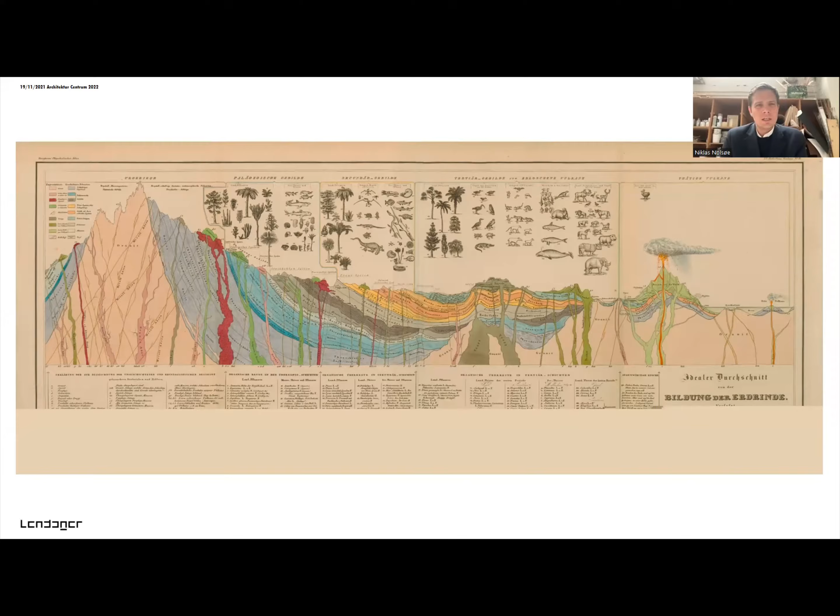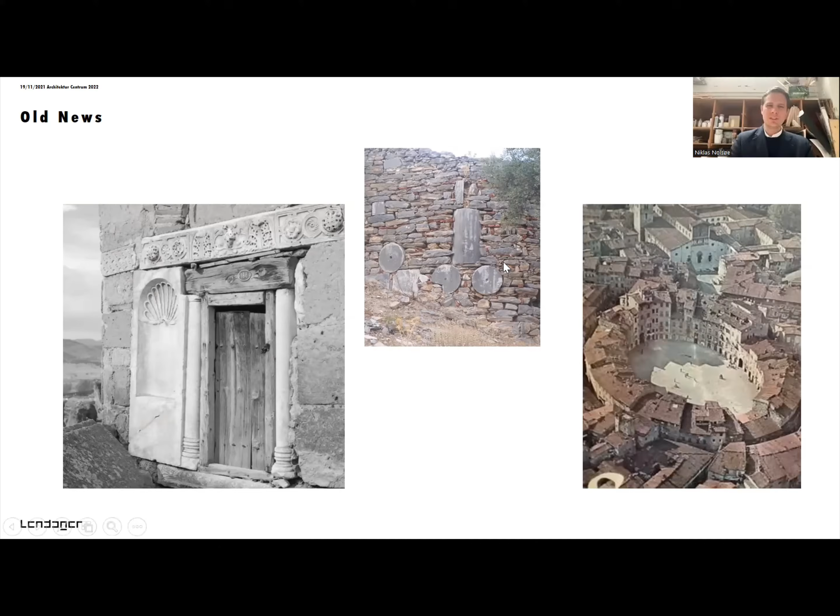This is a huge part of our methodology. Also, the way we look at things is that we're not trying to invent new things. We're rather trying to reconnect with our own past and understand that being more sustainable, being more holistic is something that we've always been, but we changed a lot in the last 70 years.

So our change-making as an architectural company - I have 3 examples, and then I have some knowledge that I'd like to share also. One of our projects is the Upcycle Studios. It was finished in 2018, so all the project development was between 2015 and 2018.

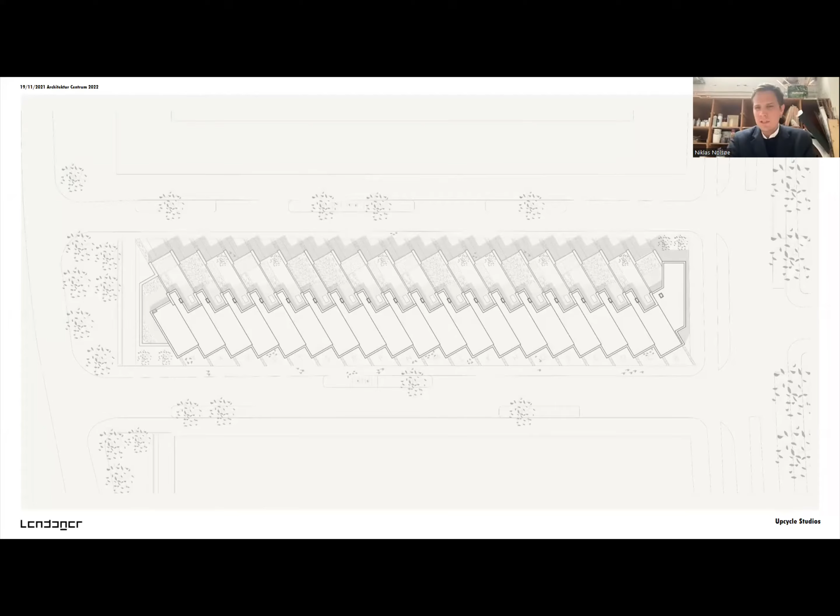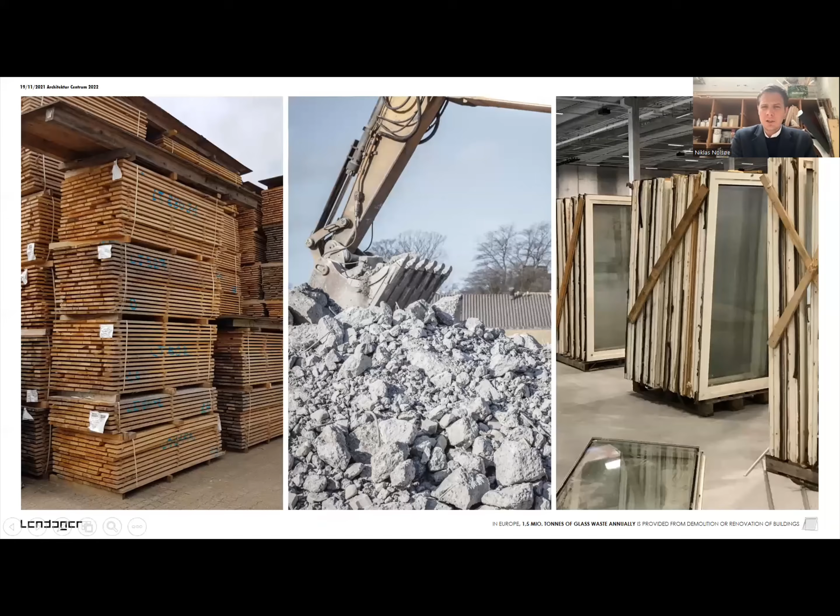It's a pretty standard row house typology where we try to mix in a new way of living, where there's both the option to have an office and to have homes. This big space you see out here is the commercial area that's connected to a big commercial building on the other side. Then the rest of these floors are the homes for the people living there. It's a huge project of interest for people living there, and the waiting list is so long that we're lucky if we get to see one of them without anybody living there.

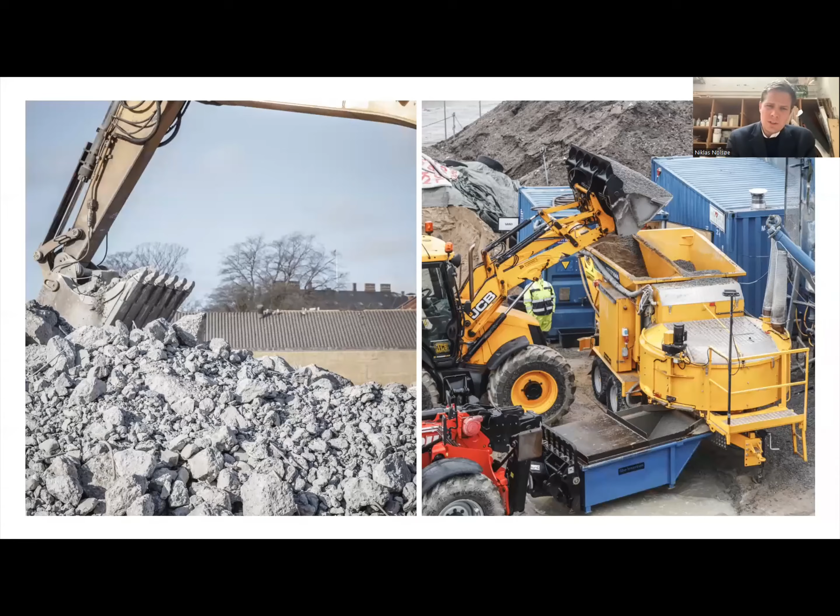But the project is what I call naked architecture, and it consists of 3 primary resources: wood, concrete, and windows. And in all of these, we try to solve an issue. So first of them is that concrete plays a huge part of our carbonization globally - cement alone is more than 6% of global CO2 emissions. And we are building more and more structures in concrete every single year. So we try to fix this by looking at how we can actually work with concrete and then use it again.

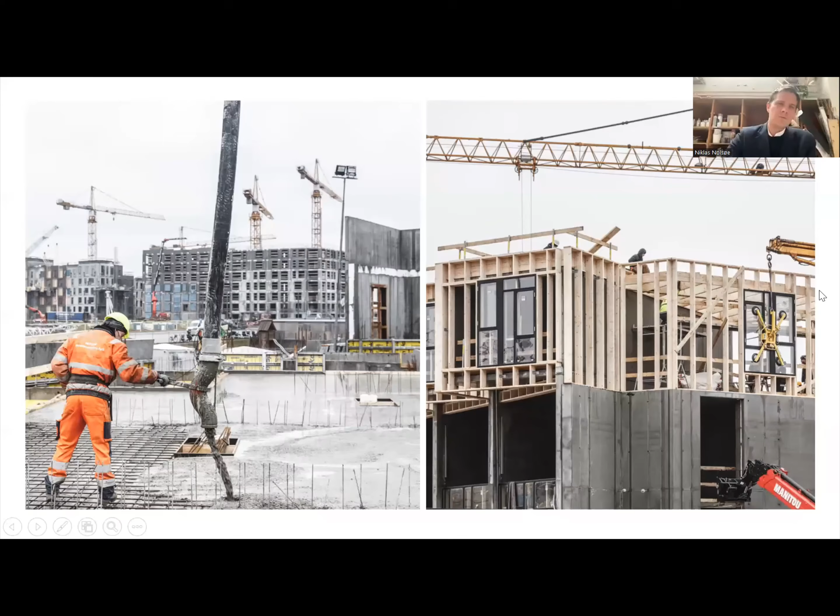So in Copenhagen, they were building a metro project, and we got all the scrap casting from that - miscasting, broken casting - and crushed it and put it into this new concrete. So 45% of the concrete is old concrete from a metro project in Copenhagen. And we built our own factory on site in order to do it, because the industry was not at that time, and is still not always, working with us.

The other part is the windows, where we gathered 20-year-old windows, 2-layer thermal glass that's been taken out, and then it's been changed out for new 3-layer windows, because we have this thing called an energy renovation. I would ask the question if 20-year-old windows are the ones to take out, but that's how it is, and that's how it's been done. So we look at the resource we get - that's a well-functioning 20-year-old 2-layer glass.

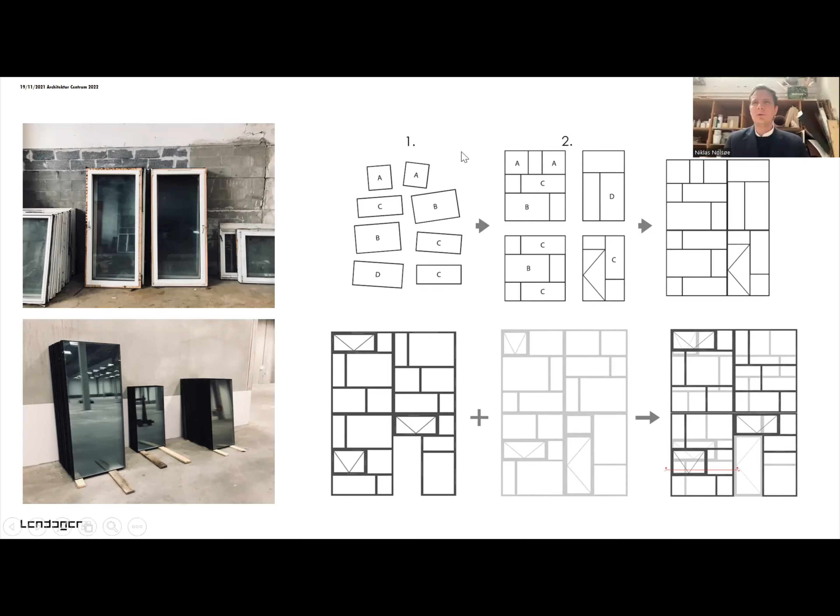As you can see here, the first photo is how they look when you take them out. And the second one is when we take them out of the frame, clean them, and go through a very thorough checking list. We did something called a body age test on the windows, where we test how long a life they had been living at the time we were getting to them.

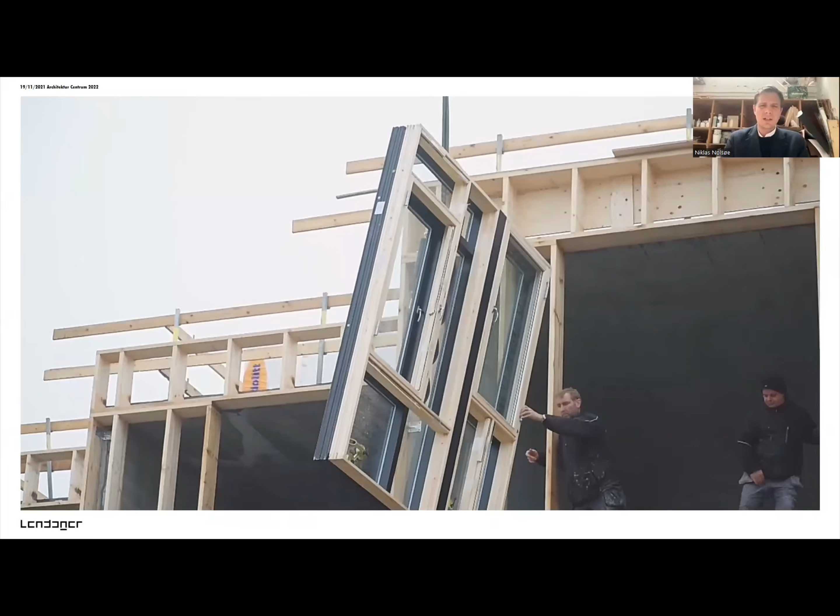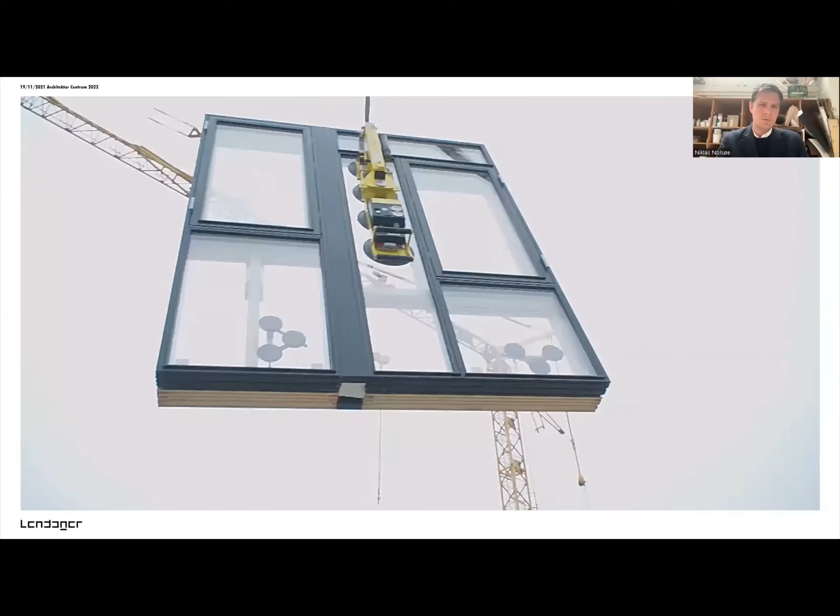You could also see in the previous slide that there were some design struggles. In order to reach this 2020 regulated energy house, we actually built a double frame where we put on 2 layers of 2-layer glass, old glass, both of them. As you can see here, in everything we do, we try to fix the problem within a known parameter.

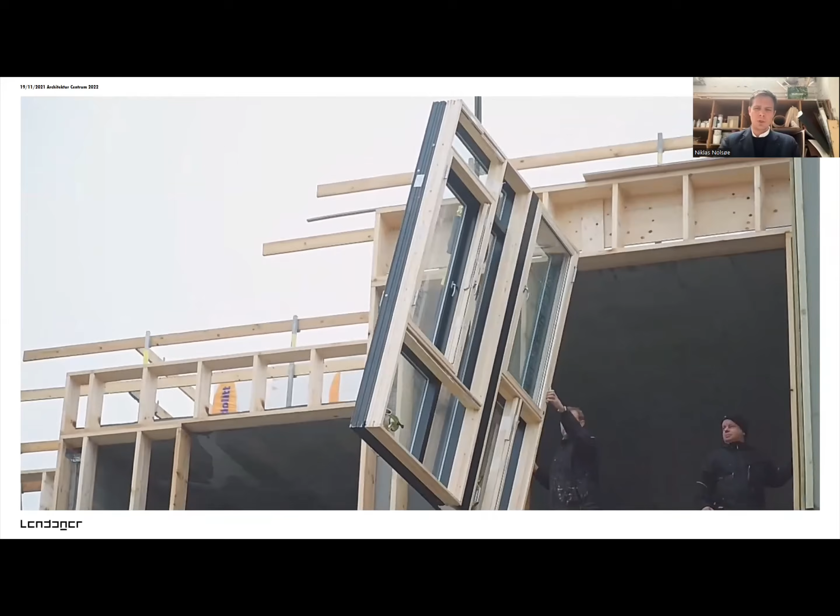So the window works just as a normal window. We don't change how the window works. We only change the prerequisites, which is the reuse and the using of the fine existing resource.

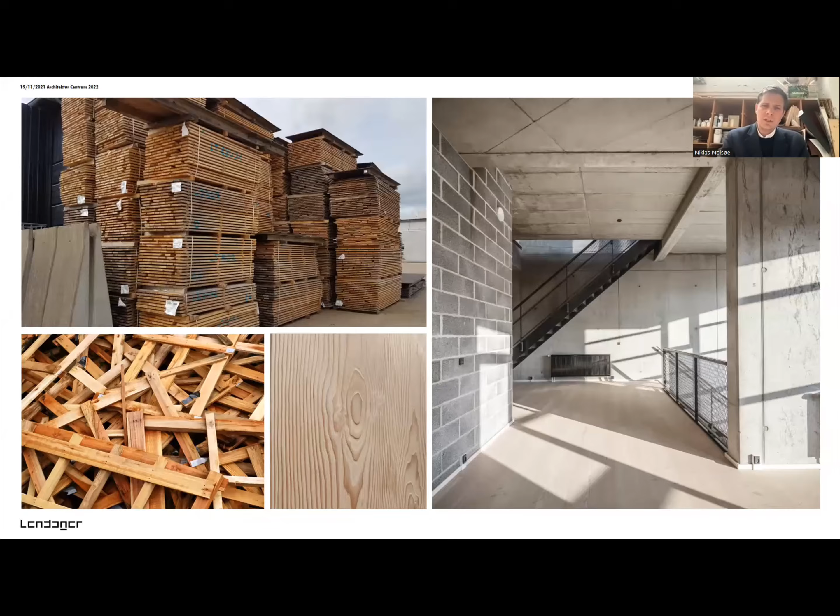Here we have the wood. All the wood in this project is cutoff or simply discarded wood from a floor maker in Denmark. The cutoff happens because they deliver full-length planks to various projects, and then they have cutoffs between 60 centimeters and 2 meters, which is too small to deliver to clients. So we got that and used it for the flooring, and then all the interior walls, which you see here in wood.

And all the cladding on the exterior were made by a big chunk of wood that had this wood disease, which gives a miscoloring. But the miscoloring is not functionally anything wrong with it, only aesthetically. And this is also a big point, that we look into how to optimize resources generally.

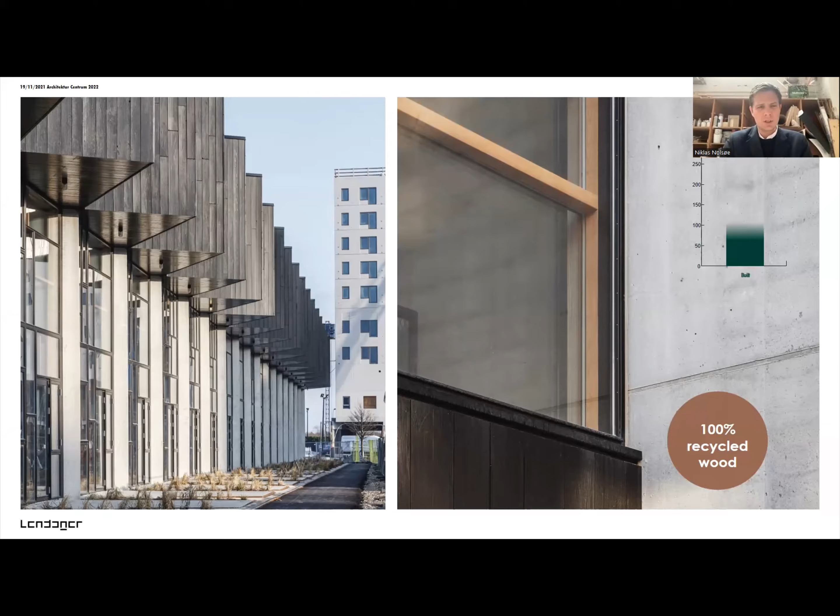Not only looking at reusing resources or using the right resource, also optimizing the use of the resource we use all the time. Here's something about the CO2 savings, 82% on the windows, and the project as it looks, and this is the commercial part of it, how it works.

Just to give an example, at one time I was designing these windows manually, and I spent 107 hours doing this design. Then we thought, well, that's not going to work in the future. So a huge part of what we do is also try to optimize on our own work experience.

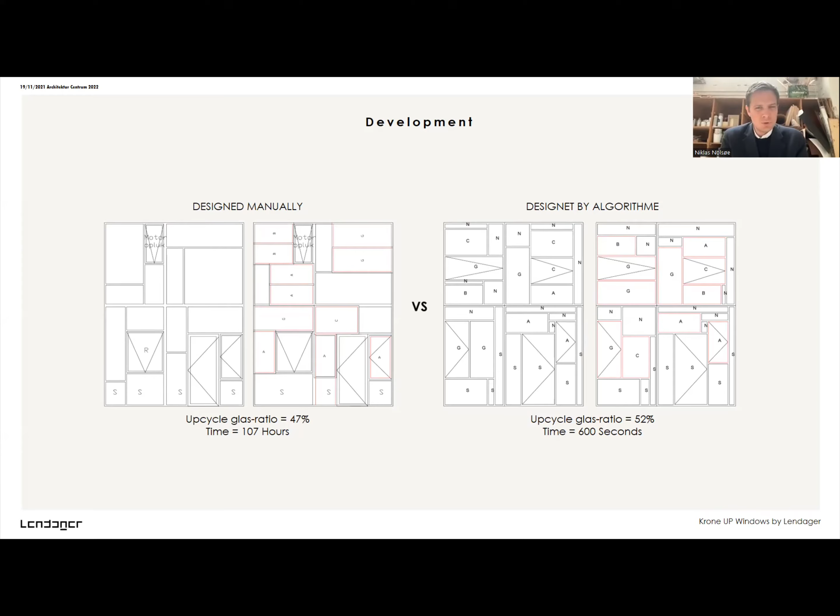So what we did is that we actually created an algorithm, and this algorithm is being tested and optimized all the time. Putting it into that algorithm, we could actually get out of the computer more than 200 different designs within 600 seconds. So now it's merely a matter of setting up some rules and then using the human eye at last to make some decisions.

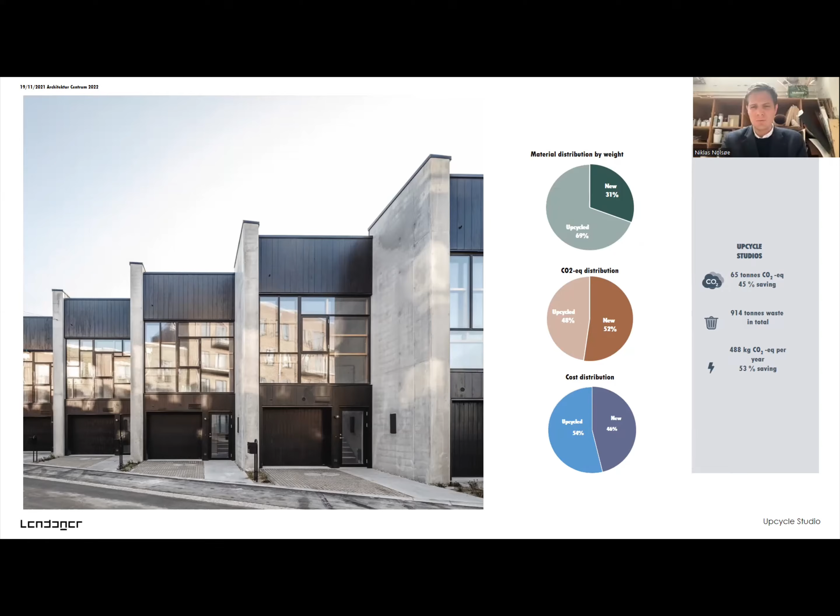The project here is both row houses and apartments, so we had to fix this within 2 different typology structures.

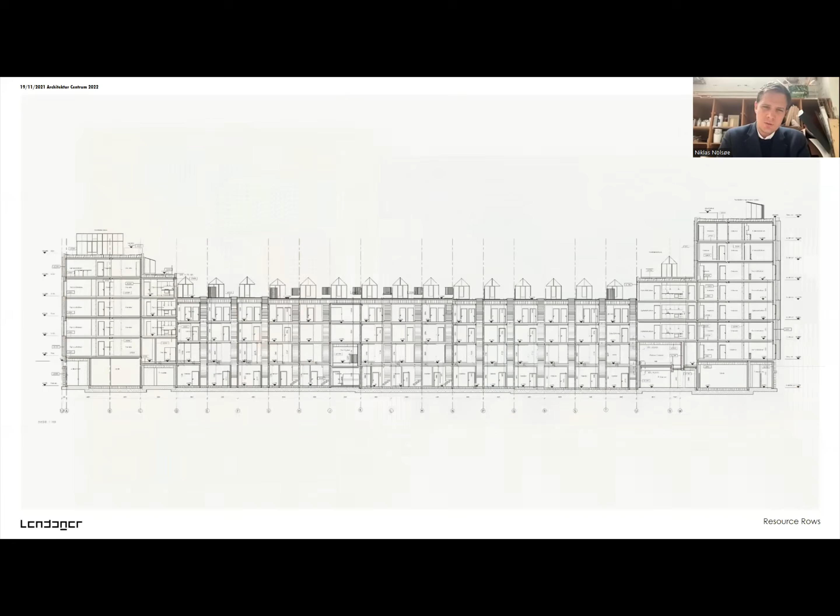In order to succeed with this, we invented a new system, a new way of cutting out, and we also discovered that since the 1960s, a lot of cement has been mixed into the mortar between the bricks. So it was actually not even possible to reuse the bricks just by taking them apart, because it's not possible to take these buildings apart.

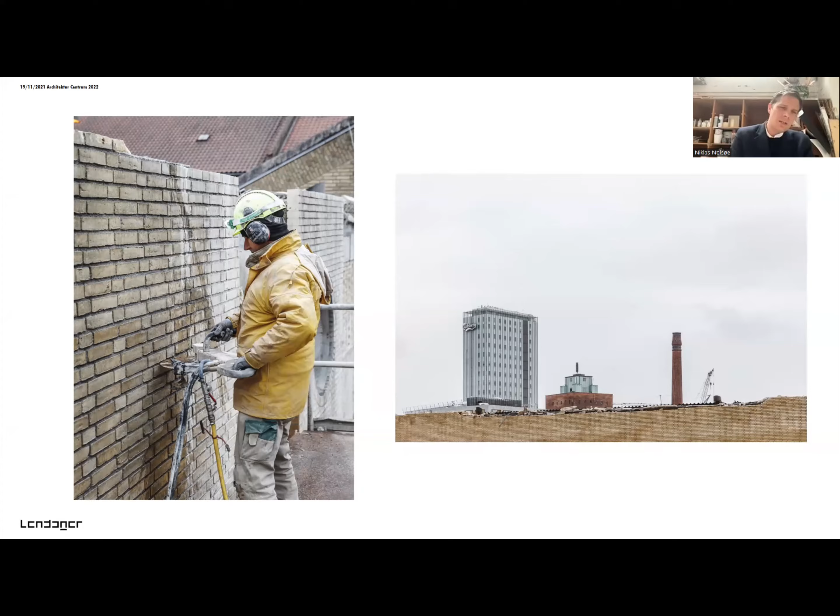So every single building built from the 1960s and up until today has mixed cement into the mortar. That's why we actually came up with this idea of cutting out, and then we created a system of how to do that.

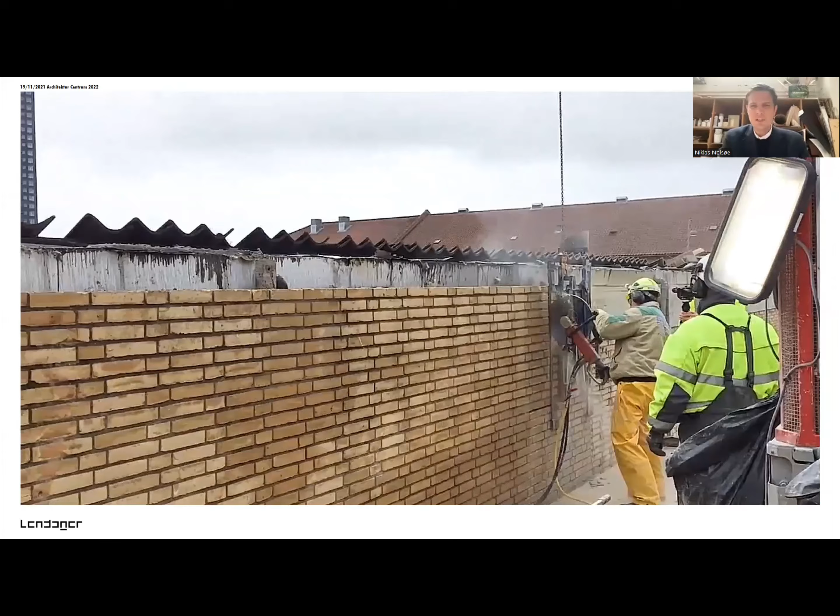As you can see here, we also developed a tool. There's a crane that's lifting up the element, and then we reuse the old installation as when we do the transportation.

We also optimized on how we could transport. So this pallet you see here in the video, there can be 4 of these elements on one pallet, so we could optimize on the transportation.

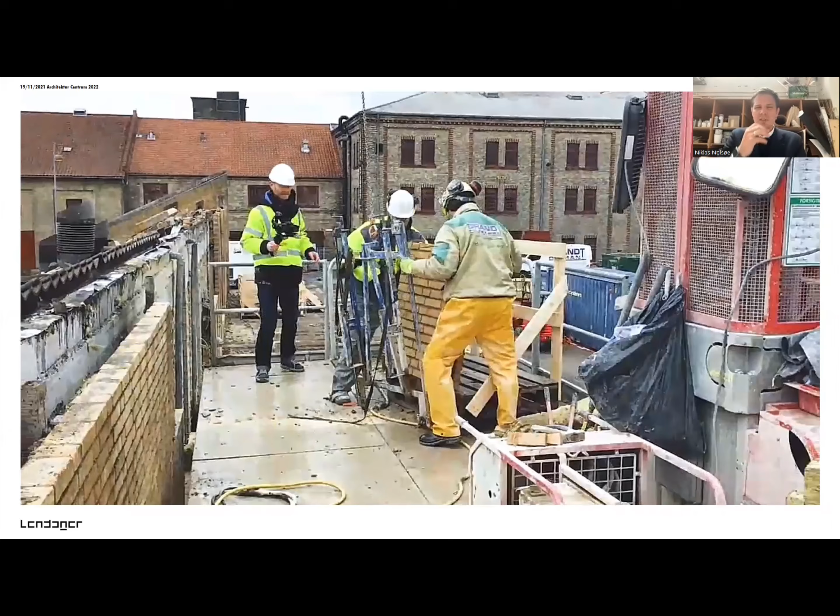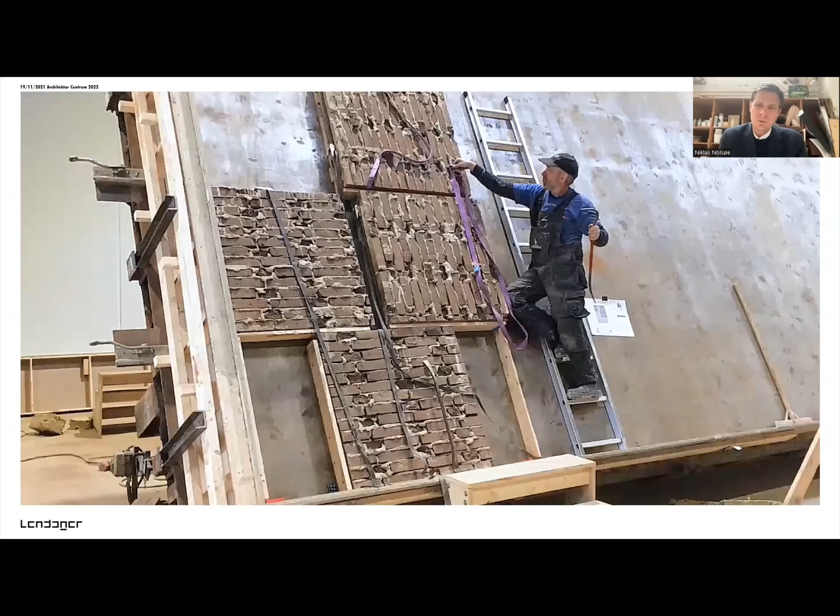It's really a matter of collaboration. I needed these guys to help me. I needed them to be part of inventing the solutions. And these guys up here, they were the ones making the elements so we could actually get them onto the house, onto the structure. Again, I need them to be part of finding the solutions, sharing the ideas, sharing the knowledge, also sharing the ownership of the idea—that's a crucial part of how to succeed with this.

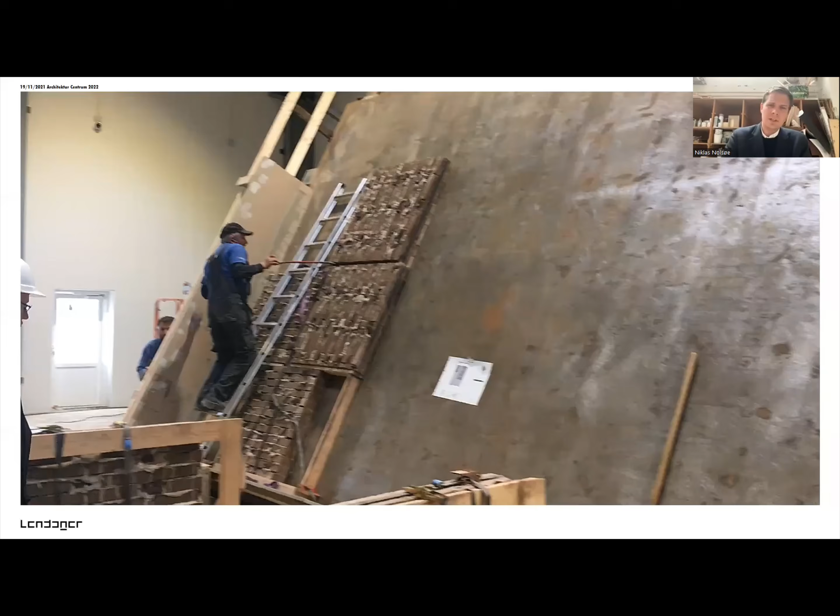Yeah, it's a really interesting video. You can see over 6,000 square meters of facade is cut out and put into this factory, and then it's been put into new elements that have been transported to the construction site.

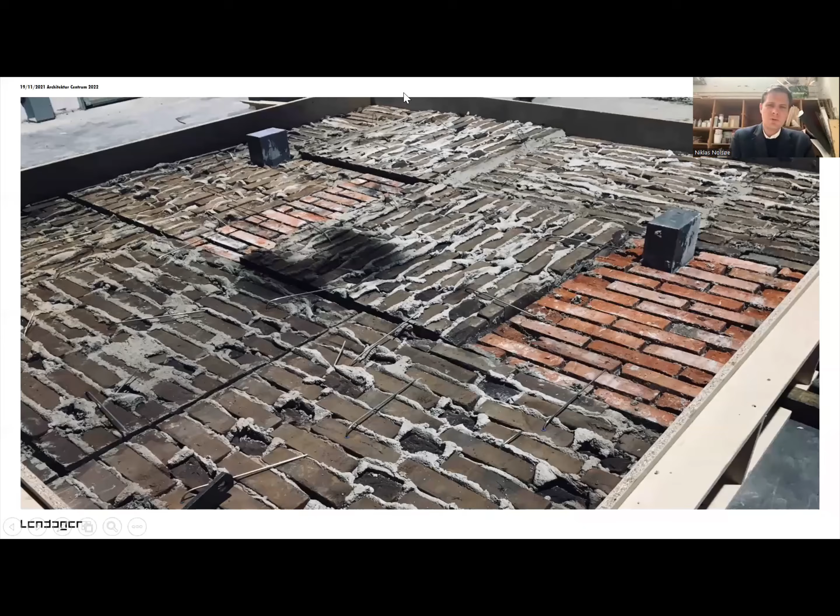Just skipping forward here, there's this other metro project. All of a sudden we got a call from the municipality of Copenhagen that they had all of these wood chunks, the ones between the tunnel elements for the metro project. They asked us, do you know what to do with it? And we suggested that we could use it and burn it, like in a Japanese way.

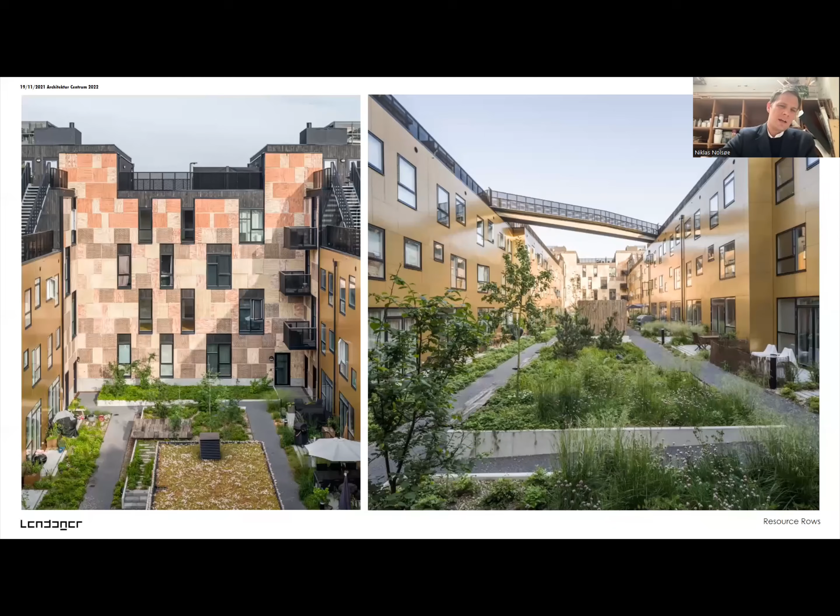Then they asked, do you want it? They had 800 tons of wood. We said, oh, wait a minute, and we had to find a place to put the 800 tons. Two weeks later we called back and said we have a place for the 800 tons. They had already thrown away half of it and burned it. So things move really, really fast in the construction industry, and time is the only thing you don't have when it comes to building new projects and building sites.

This is the project on the interior side. The bridge you see here in the middle is an old TT concrete element from a warehouse factory that was just 2 kilometers away and was being taken down. What we did here is build not only the courtyard as a social place, but the entire housing as one big social housing, you could say.

So we built one shared roof terrace for all people living here, both in the row houses and the apartments. They have one big roof terrace with more than one level to be social on, and when we do interviews out there, it's really something everybody emphasizes. There are many buildings next to it that don't even have a roof terrace, and if they do, it's only for the ones paying the most money for the so-called penthouse apartment.

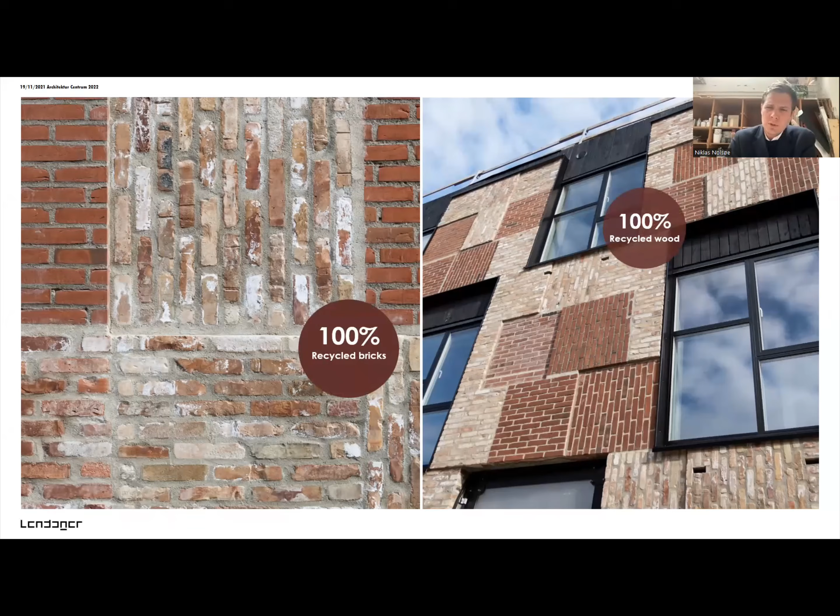One more thing: we have these roof houses on top, built entirely out of scrap. 30-year-old windows, fully discarded wood from a wood maker that treats wood and then it was mistreated, and green roofs. The terraces are made also out of the wood from the metro project, and all the wood above the windows is from that same metro project wood. All the interior flooring is also discarded wood from a wood maker. So a lot of resource efficiency on this one.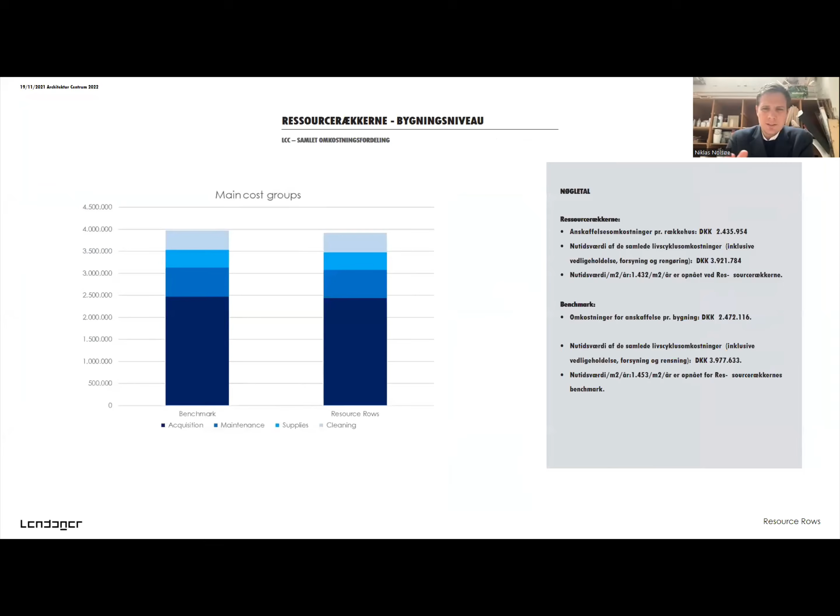Yeah, this is again the numbers here and the cost. Not going to bore you too much with that.

The last project I'm going to show you is a high-rise, a new build high-rise in Aarhus. It's being built right now. It's going to be one of the tallest buildings made in wood, 20 stories high, and the entire structure is going to be wood, besides the foundation and elevator shafts, which will be concrete.

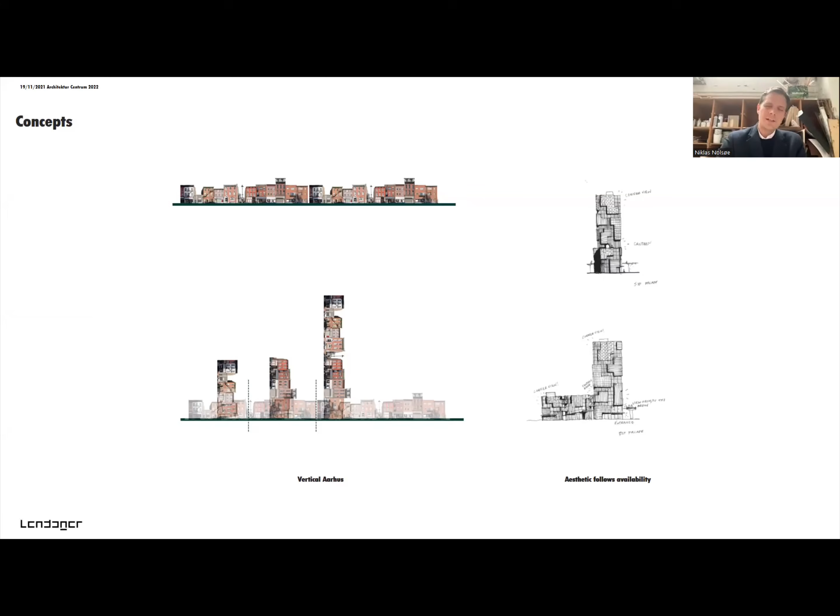The entire facade of this building, the cladding on the outside, is going to be remade, repurposed aluminum—not remelted, but taken directly from one building, cut into different sizes, and put up on the facade as new aluminum cladding. It's 25-year-old aluminum, so we save 97% CO2 by reusing it directly. What we wanted was to create a building that visualizes the reuse of resources.

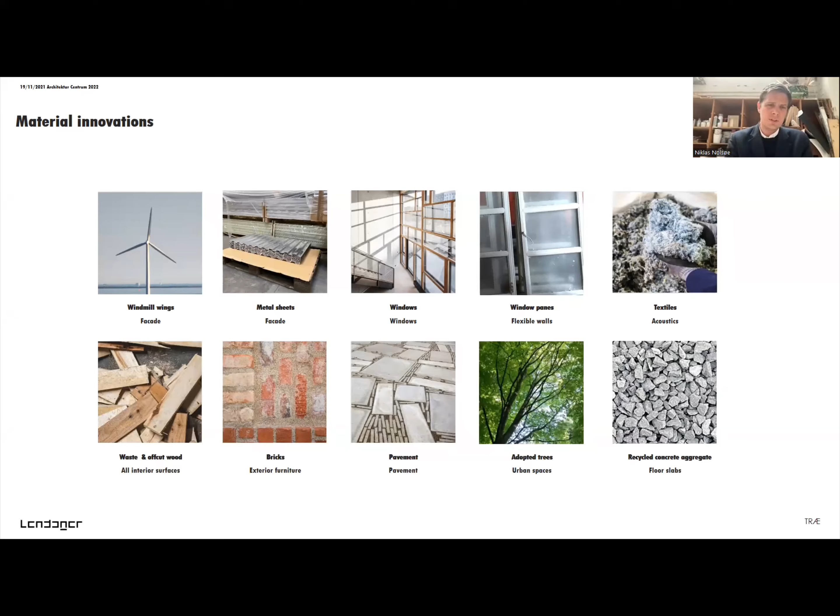Another thing we do in the project, besides the metal sheets directly reused, is the windmill wings. Windmills are a huge export category for Denmark, we're synonymous with wind energy, and it's a good image of green energy. But after 20 to 25 years, windmills are taken down because the cost of maintaining them gets too high compared to the efficiency you get from the power. So we tried to look into how we can reutilize that, because modern windmill wings are more than 100 meters long and hang at one point. We thought, how can we put this into the structure again?

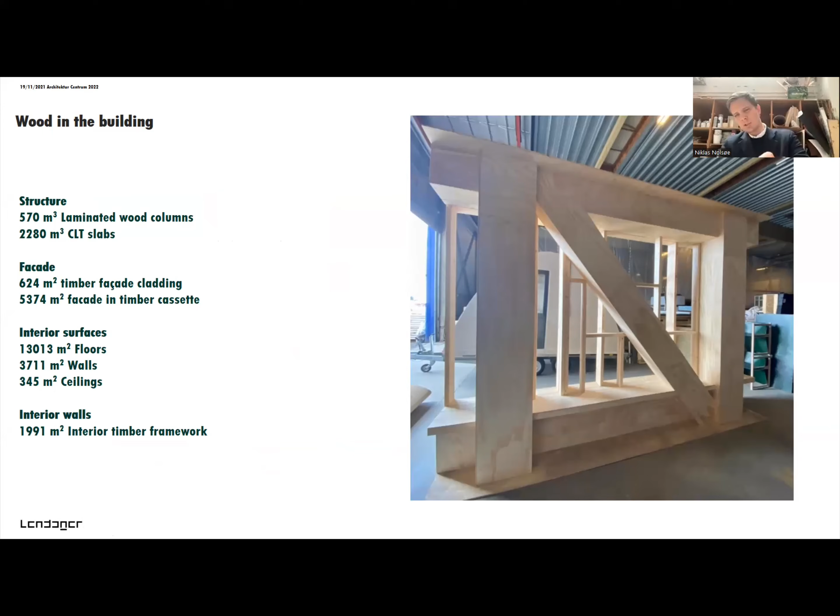So what we do is use it for solar shading in this project—this is the wood structure you see here, and on the outside facade it's going to be the windmill wings. The big problem today is we cannot undo the making of the windmill, so it's just buried in the ground. This is the way we look at all possible problems and waste issues: we see opportunities and find solutions for how to do that. The numbers are increasing in the amount of windmills being built, and also windmill wings being taken down. Normally they would just go to end of life, where you burn it or bury it.

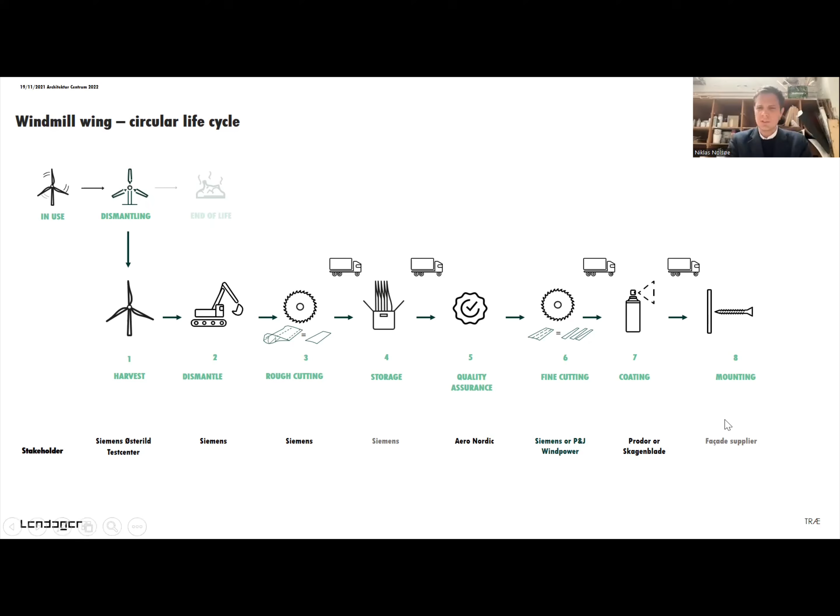This is where we get in, and then we say, well, let's find a different way. We harvest, we dismantle, we cut, we store, we find out how to put it into the built environment with all quality assurance, warranty, all of these things, and then we design a new mounting system, and then we have it on the structure.

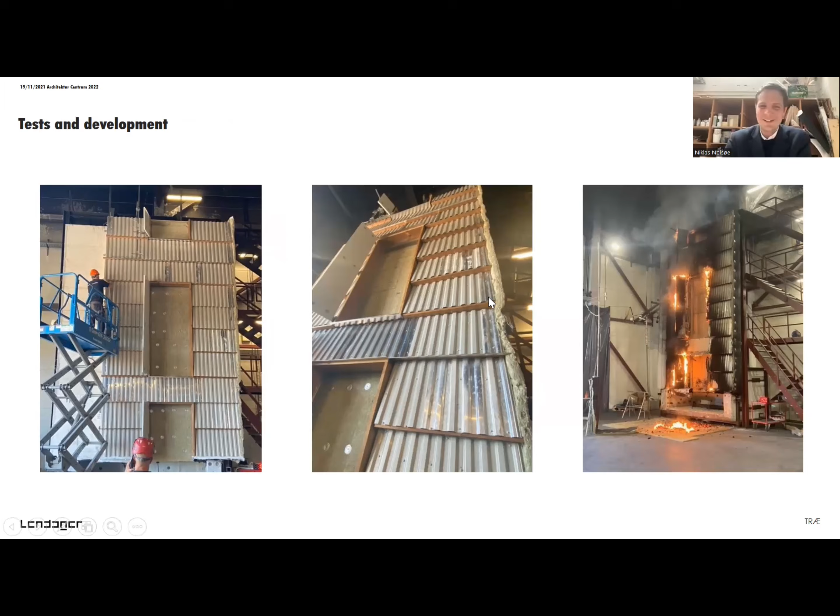This is some process images just to show how hands-on we are when we do these things. Huge fire testing, which is a big part of legislation in Europe I guess, for all of the materials on the building. This is hopefully how it's going to look.

The last thing I want to share with you—how much time do I have? Like a few minutes? You've got 2 minutes left.

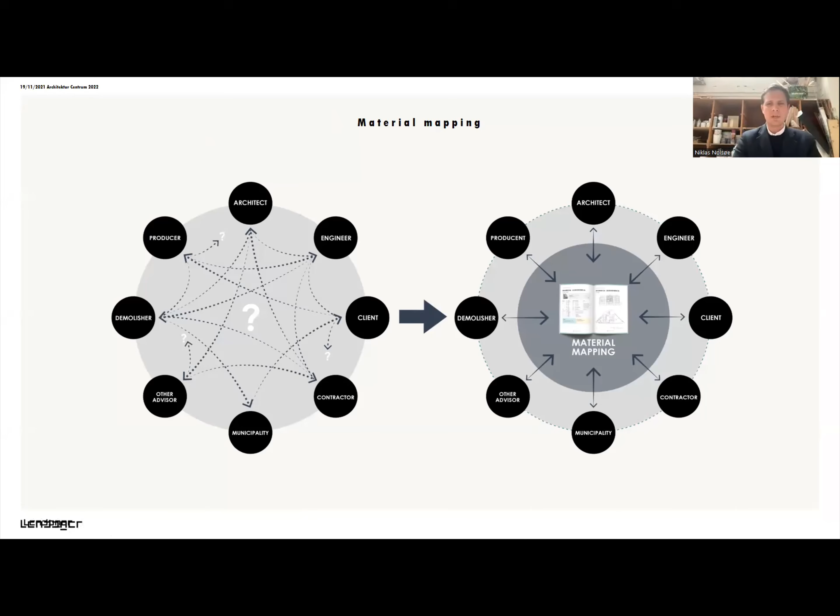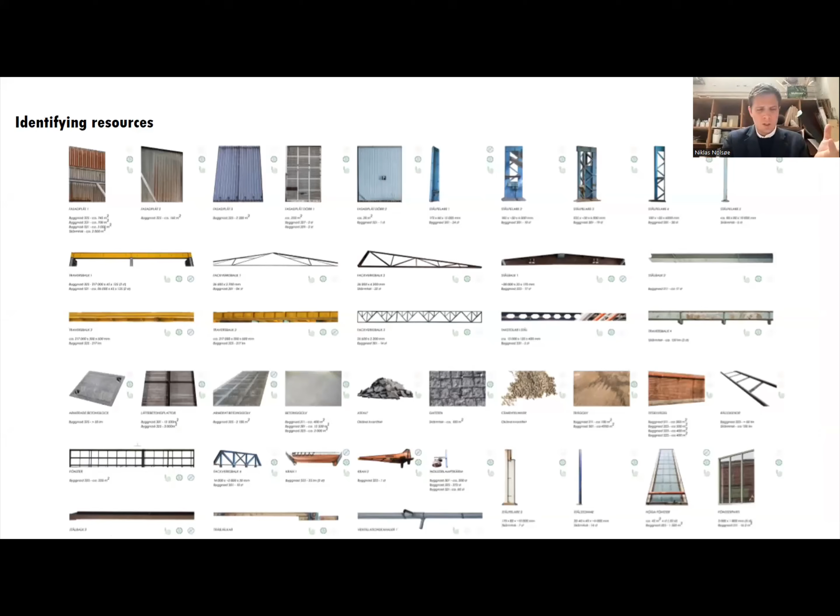What we do is try to identify resources and categorize them into something that has value—historical value, quantity value, CO2 value, or weight value. So we put a lot of different elements into these mappings and categorize them monetarily too: how much money does this represent if we go out and buy new?

This is from a specific mapping we did, where in a single project there was 1.4 billion Norwegian kroner worth of value in what they were just going to throw out. So this is also a matter of repurposing resources in terms of climate consciousness, CO2, money, and availability.

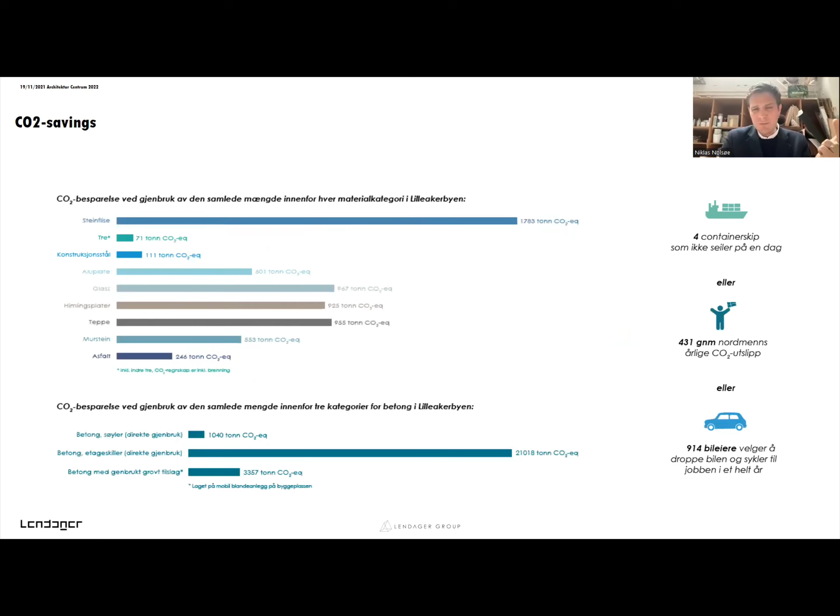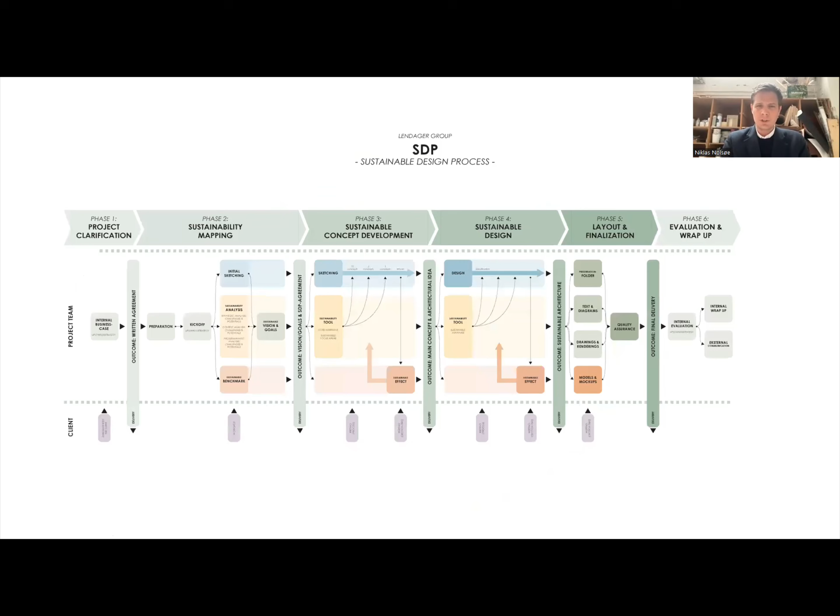We've of course developed a sustainable design methodology—actually two of them. But the reality is that a lot of it is like, it's good to have a strategy, but there are also points where we have to say, well, okay, it's not going to work if we only follow our strategy. We have to find new solutions, and new problems always arise.

My final point is this: what have we learned? We have learned that we must wonder. Never stop wondering. Be in doubt and raise the question—rather have asked than discover it's too late. It is all a collaboration.

Follow up: Rome was neither built in one day by one man, nor all at once. Never take an immediate answer for the full truth. Always challenge and try again, but with a different angle. It's all a collaboration.

And then change—things will change, they always have and they always will. Be part of it and grab it, but do it at the speed and in chunks that you can manage. Share your ideas, share the ownership, and people will help you. It's a collaboration—really, really important lessons I've learned.

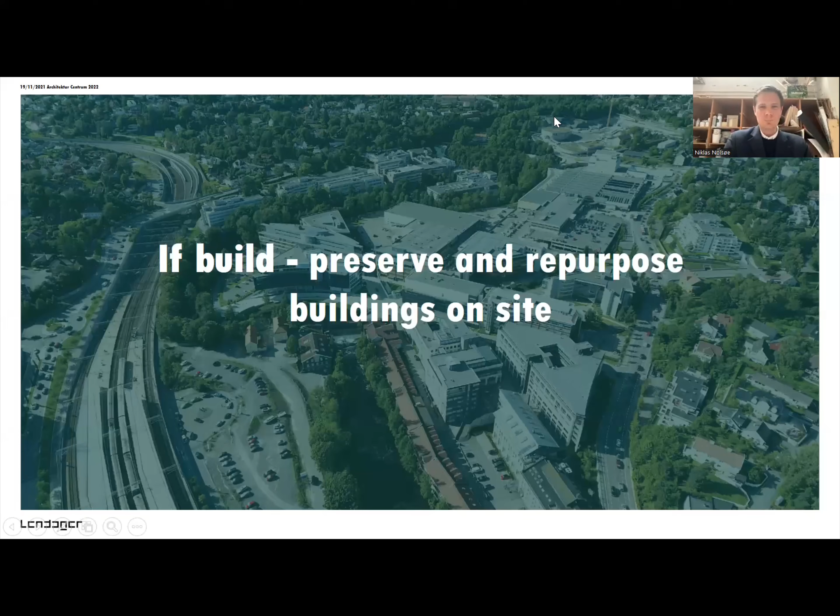And then at the end, we have some dogmas here, which maybe don't fit for Ukraine in the moment, but the rest of Europe could definitely consider: Don't build—that's one. If we have to build, preserve and repurpose buildings on site. If we have to demolish, which I'd strongly recommend avoiding, then create a circular building site and reuse materials. And if we have to do new build, use waste and bio-based materials to create a carbon bank. That was it.

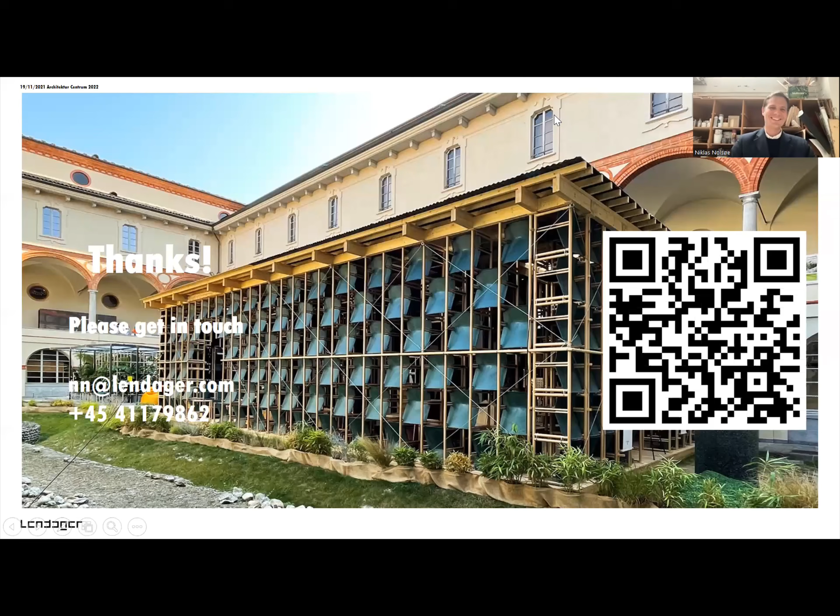Oh, that was my end. So I hope you all managed to follow along and got something out of it.